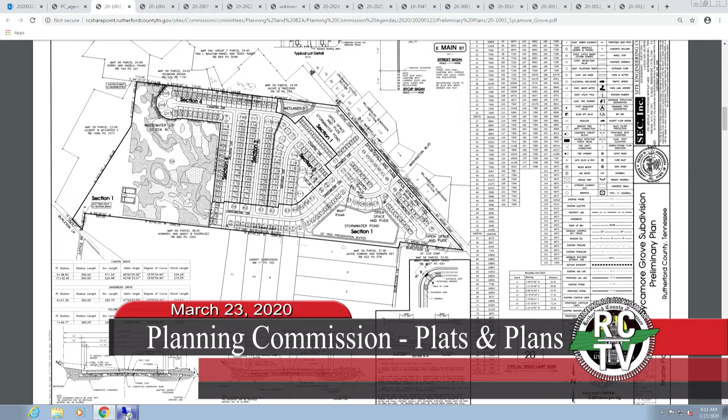Those questions will be answered at the point of construction drawings for the individual sections that will be coming in. They'll have to demonstrate to us and to Mike that the drainage in those areas will work, that this subdivision will drain properly based on our regulations.

As you recall, there was quite a bit of discussion on this regarding the drainage of the subdivision and other issues. But for the most part, our comments have been addressed as far as the preliminary plan goes. This is really just stop one on the train of approval, now that the zoning has been approved. There are several more steps left in the process. With that, I'll be happy to answer any questions, or if Mike has additional comments beyond what I've said.

Any questions or comments? Since this is a preliminary plan, are you okay with moving it forward? As far as this step goes, this will start getting them into the more detailed drainage calculations and drainage issues. To answer your question, yes, I think we're okay moving it forward, but understanding there's a lot more they'll have to demonstrate before they get any final plat approvals or permits for construction or anything like that.

I'll make a motion to approve, subject to everything satisfying Doug, regarding the drainage, just that it satisfies you and Mike. They will not start construction until we adequately review construction plans. We have yet to see any construction plans, so as far as we know they're still in the works, and we will not allow any construction to begin until they satisfy all county regulations and make sure they don't impact any of the neighbors.

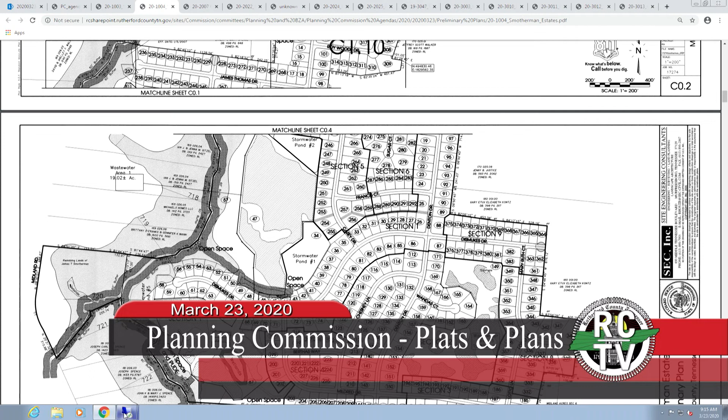Access to this property is being shown from Jones Road, with a back access point connecting to Lotto Lane, which is in the Midland Acres subdivision. The property is zoned RL, residential low density, but the zoning ordinance allows RL zoned property to apply the RM bulk requirements if it's served by a step system or sanitary sewer, which in this case is the step, and has adequate fire protection. They have provided letters to us from Consolidated saying the fire demands for the subdivision should be able to be met.

So both factors have been satisfied in the subdivision, which allows them to go to the RM bulk requirements. We do have several concerns with this plan. Most of those have been addressed.

Looking at our list of things we had left, there's still some question about showing the wetlands and everything on the sheets that were identified. That was really one of the reasons this was before the Planning Commission about a year or so ago, but it didn't proceed because we had them go back and do some wetland determinations, which they've now completed. Beyond that issue, and a couple of housekeeping issues, this is similar to the plan we just looked at, as this is just a preliminary plan. They'll have to come out with construction drawings reviewed by staff, and then final plats. This is just step one in the process.

This did not require a rezoning, if that question comes up, since this was already zoned for residential purposes. This is abiding by the regulations already in place. So with that, we'll be happy to answer any questions you may have. And again, Mike, if you've got comments, feel free to chime in.

Same situation. We have yet to see construction plans, but we won't allow construction to commence until we are satisfied that they meet all the county regulations.

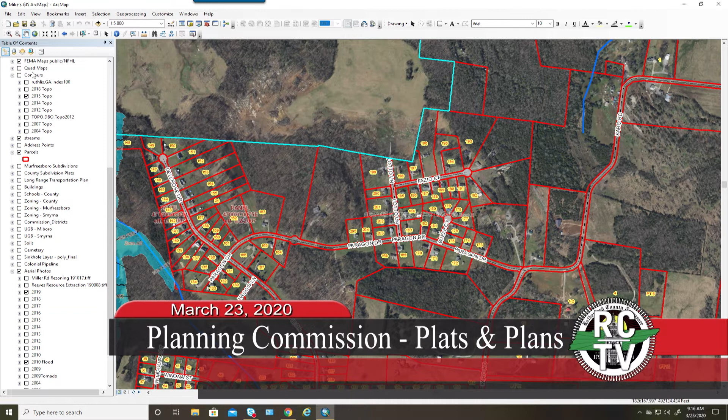Mr. Chairman, just as Commissioner Whitworth has said there, I was in that direction Saturday, and if this does come out to Midland Road, that is quite a bit of traffic on that road already. That road is already very heavy. And Jones Road only empties into Midland Road, as well as some of those back roads back there—Jones Road is not that large of a road itself. So that will have to be looked at very in detail, that traffic that will come from that subdivision. And the water that's involved in that property too. So as Mr. Demasi said there, it's got a long way to go.

Is there a motion in there? I'll make a motion to approve, subject to staff comments. We have a motion and a second to approve item number 201004 for Smotherman Estates. Other questions or comments? All those in favor of the motion to approve, please say aye. Any opposition? Motion to approve carries.

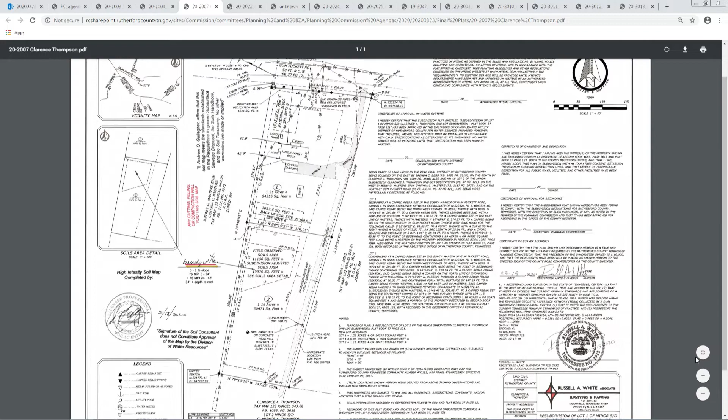I'm sorry, I'm on the wrong one here. This plat actually, the Planning Commission approved a waiver request for this property at their August 26, 2019 meeting regarding the lot being on a private easement less than 5 acres in size. So what they're proposing today is consistent with what was approved by the Planning Commission last year. However, we cannot approve any kind of plat administratively if it has a waiver, so that's why it's coming before you today. Again, the fire hydrant request has been approved, so that's a waiver they won't need. So really, the plat's in good order.

I was talking with the applicant's representative just before the meeting, and they have a couple little tweaks to make, but nothing that would hold up the plat approval. So with that, we believe it's in good order and we'd recommend approval.

Strike out the fire hydrant waiver, correct? Yes, that's correct. If I remember this correctly, this was for family. That's my understanding, yes, sir. I was looking at it with the surveyor, sorry.

We have a motion and a second to approve item 20-2007, the re-subdivision of Lot 1, Clarence A. Thompson. Any other questions or comments? All those in favor of that motion to approve, please say aye. Any opposition? Motion to approve carries. Thank you.

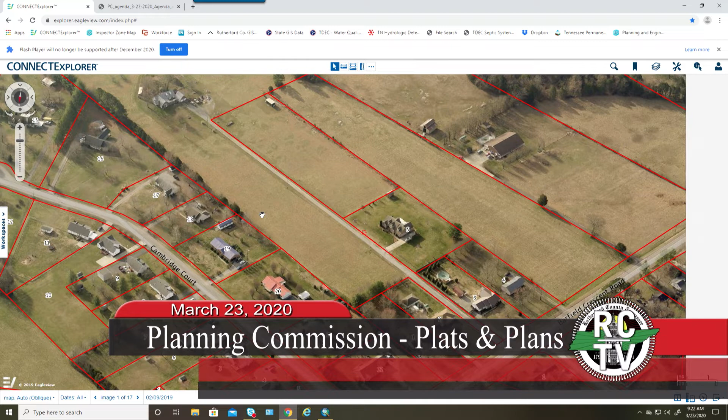I will say that the applicant's design engineer made an application to CUD for a fire hydrant determination, which did come back approved as well, so a fire hydrant waiver would not be necessary for this particular lot. With that, I'll be happy to answer any questions anyone may have.

As far as the plat's concerned, they've addressed most of the comments we have. The waivers are pretty much the main outstanding issue at this point. Our recommendation is approval—it's consistent with what was approved in the past. I'll also make that motion.

We have a motion and a second to approve item 20-2022, Mesa subdivision, section 4.

Other questions or comments? All those in favor of the motion to approve, please say aye. Is there any opposition? Motion to approve carries.

Thank you. Item 6B3, item 20-2023, Linda Harrell subdivision, 1 lot on 1.85 acres, zoned RM, located along Cranor Road.

Willie McMahon is the applicant. Waiver for the creation of an unbuildable lot. Doug explains: the applicant would like to transfer the subject property to a family member.

This proposed lot was actually created when Craner Road was extended through the property years back. It was part of a larger tract, so it's been identified as the same tax map and parcel as the parent tract, but it's just sat there. Now they want to do a transfer, and to do that it has to have its own unique ID as far as a tax map and parcel, so it has to be platted.

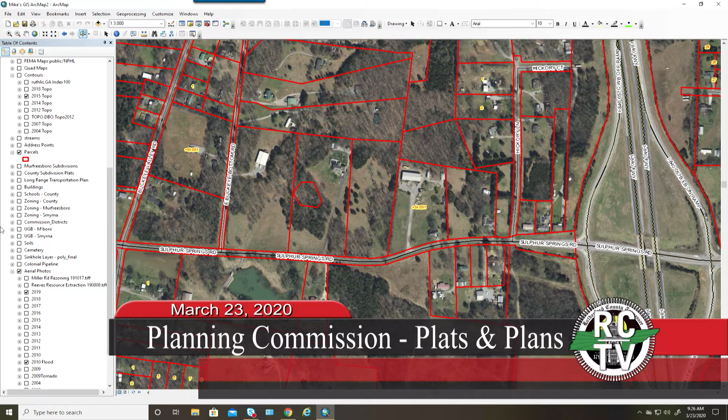Staff has also identified some other deficiencies with the plat, but for the most part those have been addressed. There may be some tweaks here and there, especially with consistency with the site plan, but other than that, unless Mike has any additional comments, we're okay with this being approved as long as they work out those other issues prior to recording. I'll be happy to answer any questions.

This will go along with the site plan. There might be some tweaking that needs to be reflected on the final plat. They have an off-site detention pond area, and they have some other issues that we need to address. But all in all, it's in good shape.

The owner owns both properties. He's going to have the septic line on somebody else's property, or is that going to be on his? Well, regardless, right now he'd own the whole property since it's still one tract of land. The reason for the plat is to subdivide into 2 tracts, less than 5 acres, but that's why all the different easements are there. So in the future, if ownership does change, there's always a record that they're relying on this. A new owner couldn't come in and say they won't let them use that, since they know there are easements there.

Now, Manley, did they have enough soil on Lot 1 for Premier Fence, or were they going to need to share some with that? They do have a small septic soil area on Lot 1, but a much larger one on Lot 2. The existing building on Lot 1 does utilize the soil there, but only a small area because it's just like a bathroom or something in there.

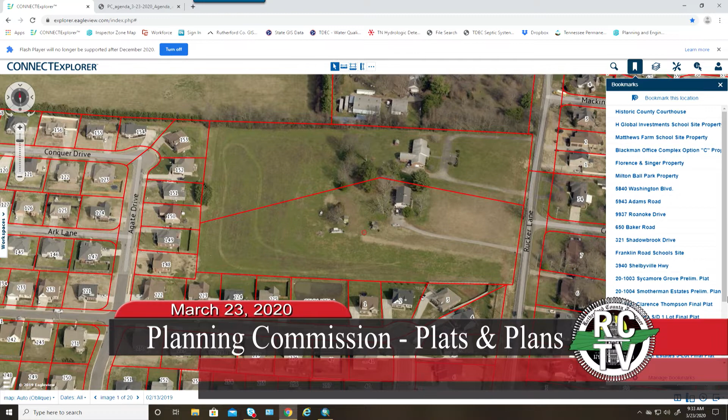I know our engineering staff has been working with the applicant on those issues. I'll let Mike address those in more detail. Most of the concerns have been addressed from a planning and buffering standpoint. There's quite a bit of existing buffer material out there that the applicant is proposing to use, which we allow for. There will need to be a little bit of area with some supplemental plantings, but that's nothing that will hold up approval.

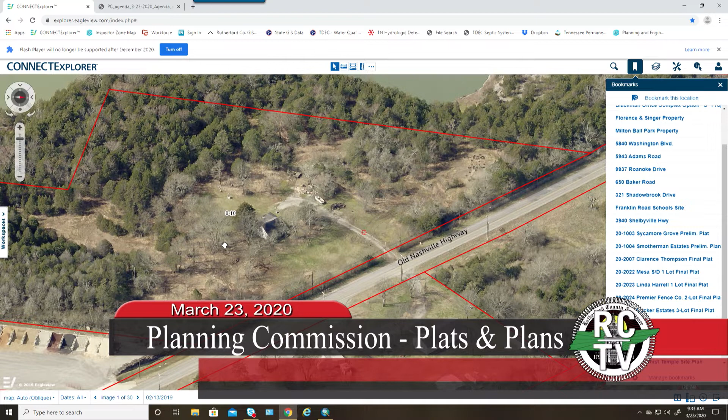That's something we can work through as we get ready for the permitting process, but again there's quite a bit of plantings out there, so the landscape plan just needs to show a little more of that. From a staff standpoint, I think we'll be in good shape. That was one of the concerns during the Planning Commission's public hearing, as I remember—that a lot of buffer area be left around the existing residences, especially to the south. So with that, I'll turn it over to Mike for any drainage concerns, but from our standpoint, most of our comments have been addressed. Thank you, Doug.

Questions or comments?

Thank you, Jim. We have a motion and a second to approve item 19-3047, Superior Property Solutions. Other questions? All those in favor, say aye. Any opposition? Motion to approve carries.

Thank you. Item 6C2 has been withdrawn. Item 6C3, 20-3010, Premier Fence Company, construction of a 3,200 square foot construction sales and service building on 2.35 acres zoned CS, located along Sulphur Springs Road. Walter and Kristen Donnell are the applicants.

Doug. Yes, sir. Thank you. This is the site plan we were referring to earlier when reviewing the plat along Sulphur Springs Road. The applicant is proposing to construct a fence business on Lot 1 of this property, which is what you have before you. As stated earlier, they will have to rely on additional septic on Lot 2, which was what showed on the approved plat.

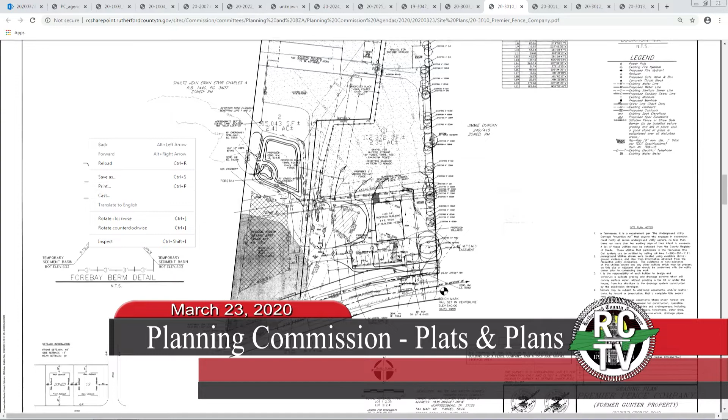Just looking at it, the shortest distance between two points is a straight line, and I think that's where the sewer service line might be. So if they're digging in this area, it might impact the sewer service line for that building. Like I said, just some minor stuff, but these are things that keep me up at night.

They are showing some cutting around the existing—the proposed—septic system here. Typically you don't want to cut anywhere around that, so we'll have to have them adjust that 540 contour. We'd like to see more of the parking area directed toward the pond, to allow it to gather. I think some minor changes there, directing the water towards this existing culvert.

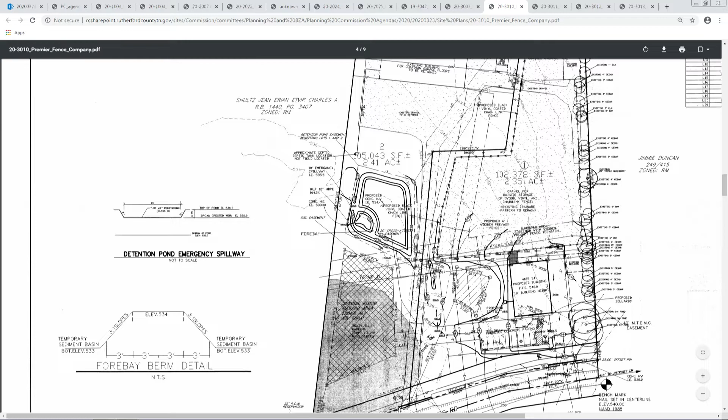There's an existing culvert underneath this driveway, and they're showing a little bit of a swale being dug here. But if we can get the water to flow in the direction of that pond and then adjust the pond, it should be in good order. So there's some minor tweaking to go, but all in all it's a pretty good plan.

When they establish where the field lines are—yes, I would have them... this is the soil area here, and I assume the existing building has a straight line to the field line here, but I don't know that for certain. It could go around underneath the driveway. We need to get them to locate that tie line to the field line and make sure they're not cutting through it when they start digging.

When they mark those, do you physically go out there and look at it? They'll probably have to go out and probe them. Yeah, yes sir, and then I'll have them reflect that on the plan.

So that's not a big deal. Looking at the topography, the pond could be adjusted without digging down so deep, and maybe relocated a little bit, but that would in turn change the recorded detention pond easement on the plat. So those are two things that kind of tie together.

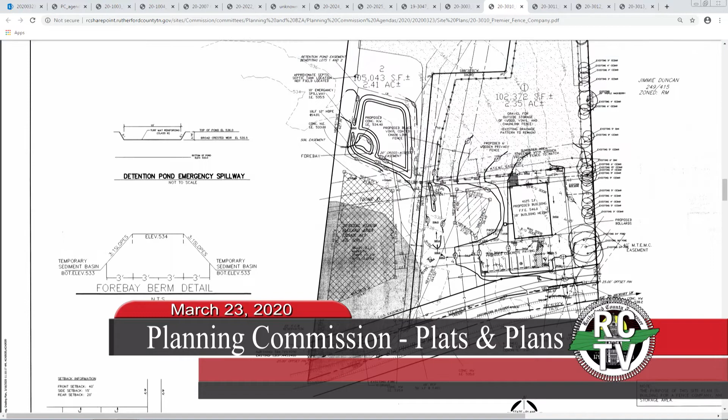But it's doable. Doug said there's some tweaking needs to be done with the landscaping plan. I'd like them to look at the solid waste enclosure, trash enclosure, which is close to an existing overhead power line. I might get them to look for a new spot, maybe in this gravel area, or another location. If you've got one of those garbage trucks, you don't want it swinging up and down underneath that power line. But all in all, it's doable.

No, sir, I think these are minor changes that we can work out before we begin construction. And I'll make a motion to accept with staff comments.

I have a motion and a second to approve item 20-3010 for Premier Fence Company. Other questions or comments? All those in favor of that motion to approve, please say aye. Aye. Opposition? Motion to approve carries.

Thank you. One observation, Doug and Mike: what you said was minor, but there was a lot of it. And it kind of bothers me as a planning commissioner that we're seeing stuff for a final plat approval that has a lot of stuff, even though it might be minor. Is that something that makes me, and I see a couple of other folks, a little uncomfortable that a final plat is coming to us with still a lot of stuff to be done?

Well, that one was associated with the site plan. So we've got to get the site plan situated, and then the final plat has to reflect that, especially with that offsite easement. If there wasn't an offsite easement, the final plat would have sailed on through without it. It's the site plan that needs some more work than the final.

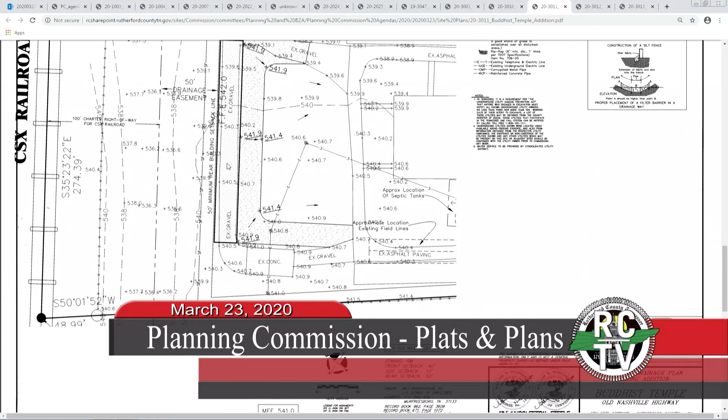It's a lot of it. This area in the back is in a FEMA flood zone, and non-livable space. The finished floor is 1 foot above, but they do have a little box down at the bottom with a minimum pad, minimum floor is the same, but it doesn't reflect what's shown on the proposed building site.

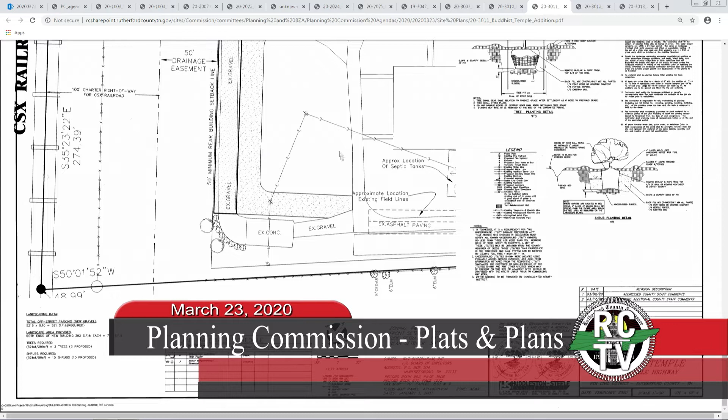Let's see what else — I think that was the main thing. Let's just coordinate that. Oh, and the field lines, some of them might have been impacted by prior construction. We'll need to get them coordinated with the septic system, TDEC, groundwater protection, septic permit office, and then also building codes wanted to research some of the buildings that in the past were constructed on this property.

And one of my pictometry maps is kind of acting peculiar. Let's see if it'll work. Okay, so where they're proposing to build is in this area here. It is in a FEMA flood zone a little bit, but it's going to be open on all sides. I think it's more like these other structures where they're open on the sides.

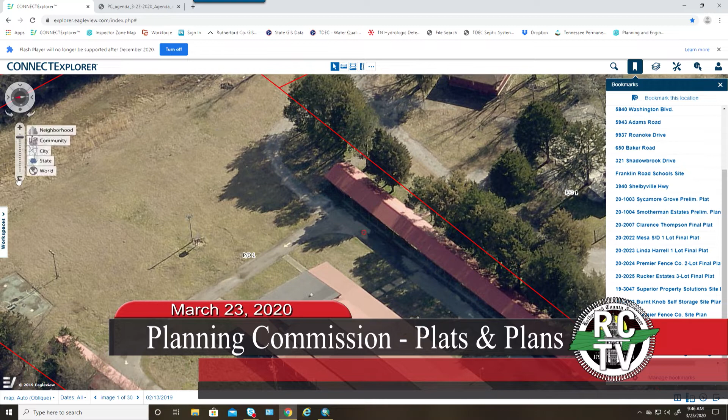So it's not going to be as big of an impact if the water's allowed to flow through freely. These are like open pavilions here, and they're proposing to build right back in this area. So we just need them to coordinate with the previous construction on site and make sure the septic systems aren't impacted by that construction.

It's just because non-livable space has a lower standard, just 1 foot above the base flood elevation for FEMA. Livable space is 3 feet above, so it's a little stricter if someone were to live here, but since it's not a living surface, they can build to the lower standard.

So if they build it up, Mike, and build a pavilion type of building, open space, and at some point in time they want to enclose that, they would not be allowed to do that. No, if it's going to be used for living space. If it's just for storage or non-living religious function, they could still do that, but only if it's built up to the standard we require.

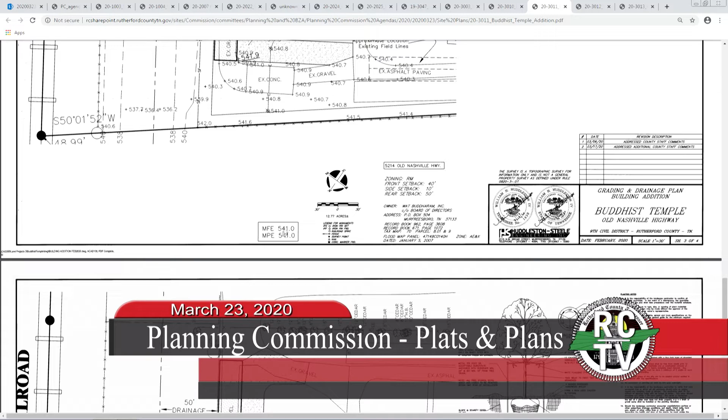So they're building it up. We are requiring that they build up, and just want their plans to reflect that. See, the floor is at 542, but they have a little box down here showing minimum finished floor 541, and the pad at 541. That should be adjusted to reflect what's up here—so there's a little inconsistency.

Let me make sure I'm clear—what if they prefer to have the pad at ground level so they don't have to add steps and handicap ramps? They would just have to adjust the site for that. We can't wave our magic wand and say you don't have to do the FEMA requirement.

But if it's not a livable space and it's just a meeting space, why do we care if it floods? Well, we still want the building protected, and we don't want the building impacted by the base flood elevation for what they used to call the 100-year storm event—it's now a 1% chance. So there's still a statistical chance. Floodwaters have hydrostatic pressure that pushes on the building. We don't want the building...

Mike, I get that, I get that. But there's no hydrostatic pressure to push against because there's no walls. Right, but—and this is not a livable space. So why do we care? I mean, we could have them lower it down, but still—do you see what I'm saying? If it's not a livable space, if it's just a meeting area, it's nothing.

This is no different than the pavilion at Barfield Park. Right? Why do we care? Why would we want to make them put in a handicap ramp and stairs for these people to climb, just to get it to an elevation for a flood level that we don't even care if it floods?

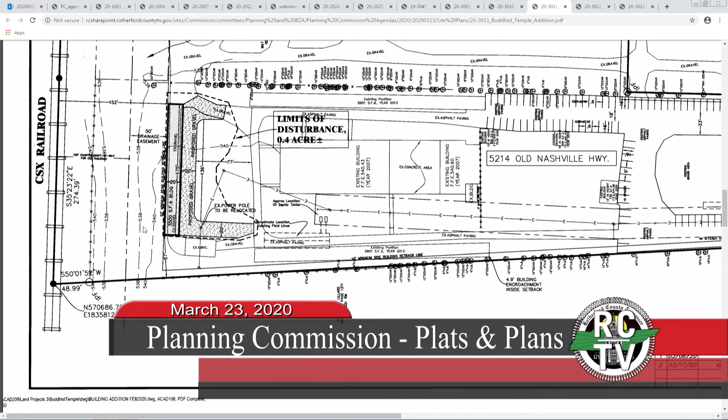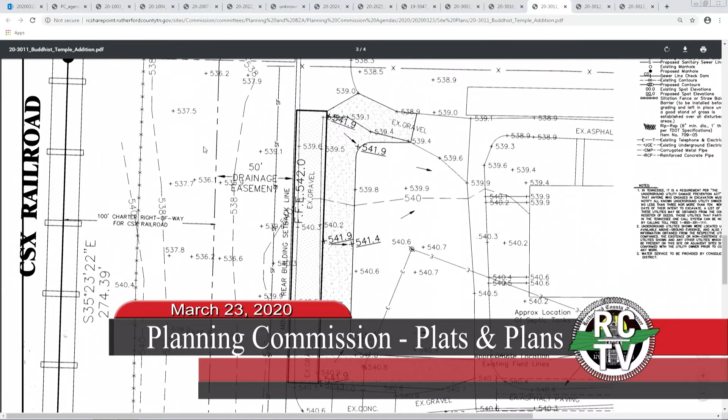Let me see if I can get that right. Okay, from, I guess, from the southeast flowing through here. But no, just to answer your question, Mr. Whitworth, no, we didn't see that necessary for that little of an area.

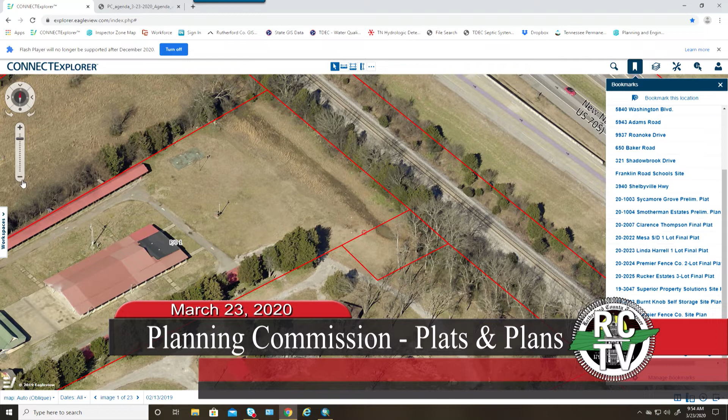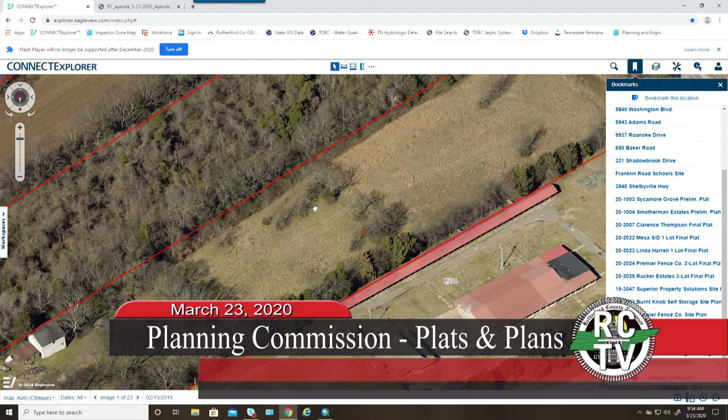Staff recommends approval. To approve with all of staff comments. We have a motion and a second to approve item 20-3011 for the Buddhist temple. Other questions or comments? All those in favor of the motion to approve, please say aye. Is there any opposition? Motion to approve carries. Thank you.

Item 6C5, 20-3012, Tennessee Bounce Parties, construction of 12,000 square feet commercial building, party rental equipment with related parking on 5+ acres, zoned CG, located along Old Nashville Highway. Active Investments is the applicant. Doug? Yes, sir. Thank you.

The applicant is proposing to construct a facility that rents party equipment, such as inflatables, tables, chairs, etc. The property was actually rezoned last year, and this is in the same general area as a couple of the other site plans we've already considered today. There were several comments identified after our initial review. Most of those have been addressed. I did have some concerns with some of the buffering being shown on the landscape plan.

There still needs to be a little work done on that. But again, those are things that shouldn't hold up any kind of approval, but we'll continue to work through them. They do need to identify a type 2 buffer between residentially zoned property and properties zoned commercial. Further back on the property, it's actually adjacent to land that's heavy industrially zoned, so the buffer doesn't have to go that far back.

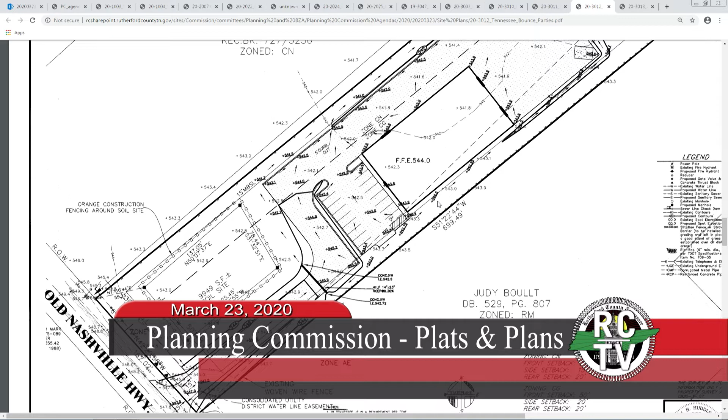So they're proposing, I think, a 12,000 square foot building here. They're elevating it and adding parking and drive aisles and storage area in the back. What I'm kind of concerned with, the building, they're raising it up, but water kind of flows from the southeast to the northwest through here. So I'm worried about water getting trapped here. They are showing a little bit of improvements, but I don't know if it's enough to get the water out of there. Might have to extend the ditch back a little bit here.

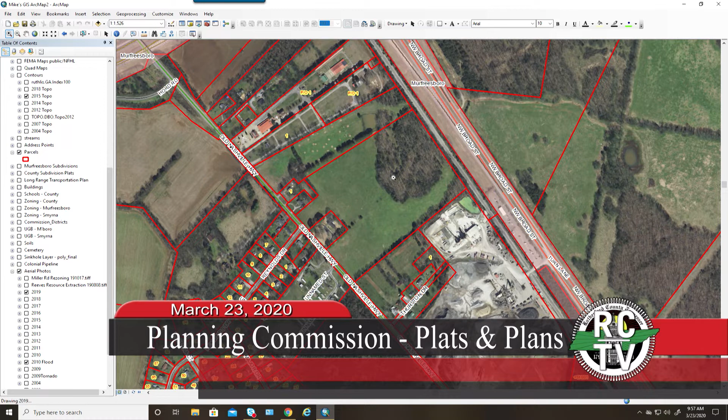And then it drains, let me get to my maps. It drains to an on-site area that we were hoping was going to be used for a regional detention area, but we're not seeing any improvements on that proposed location. They're going to utilize an existing sinkhole and modify it, but let's see if I can get my contours to turn on.

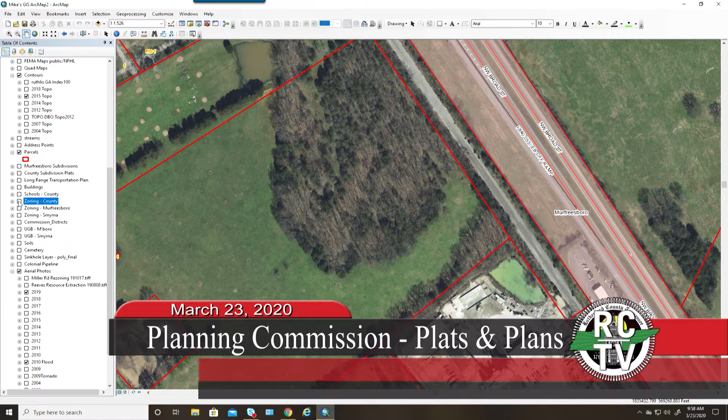In this area, the proposed site is here, and like Douglas said, there are other tracts that will be developed in this area, and we thought that'd be a good idea to have a regional detention instead of each separate lot having their own detention.

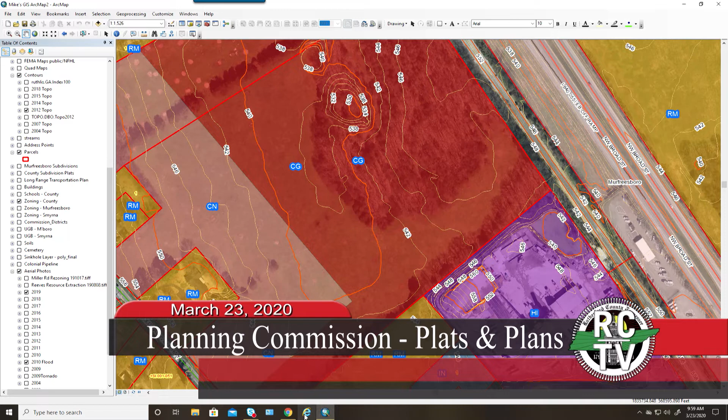We were wanting them to maybe have a regional pond here, but for some reason my contours are not coming up. Let me try a different one. There we go. Here's the sinkhole location. We were assuming that they were going to modify that, but we have, they're not showing any improvements to that area. So I don't know if we've addressed everything on that. So if we're adding additional parking, roof, all that substantial area, we're going to need to see some improvements.

This pond takes water, sinkhole takes water right now. We're adding all this additional impervious area. How is that going to impact the surrounding property, downstream people, if it builds up and spills over? So this one, I think, still needs a little more cooking because I haven't seen improvements to that pond. Maybe Manley can help me and tell me what's going on with that.

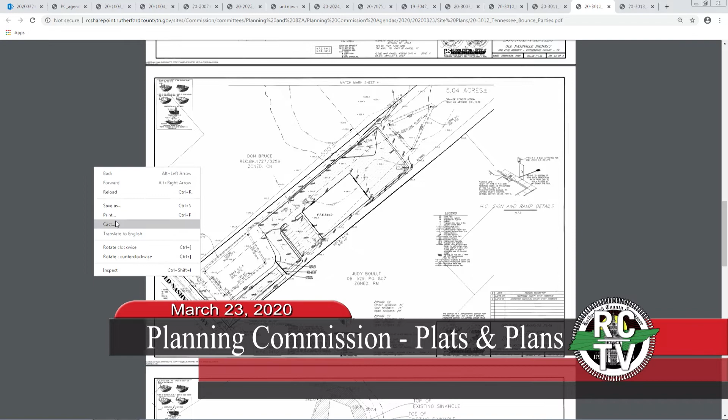Morning, Commission members. Manley Thweet with Huddleston-Steed Engineering.

The sinkhole he's referring to, we're not going to modify it. We've done drainage calculations for that sinkhole, and based on its present condition, it is able to treat the water, really not only from this tract, but also there's plans to have this property in I think 5 separate tracts. Our drainage calculations show that this sinkhole in its present condition would be able to treat 3 of those tracts, and then the other 2 would not be able to go to that present sinkhole.

We have already begun the paperwork process for TDEC to get an underground injection control permit, basically to allow us to be able to drain to that sinkhole. So the plans right now are not to improve the sinkhole at all, but just to have the stormwater go to it as it is, as well as have the next 2 tracts to the northwest be able to drain to it. If the Commission requires some modifications to it, that's something we'll have to take into consideration, I guess. But under its present conditions, our calculations do show it's okay.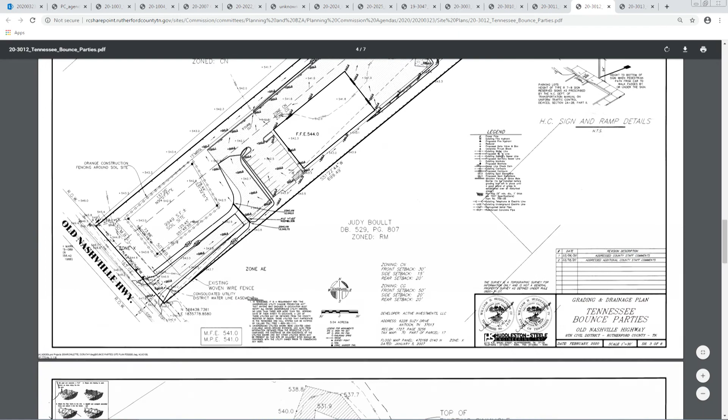Well, if I can go back to the plans, this relies on conventional septic system soil. So he is developing in between his two soil sites. There's one large one in the front and a smaller one in the back. And the way it is draining now, he could essentially lose one of his septic system soil sites to obtain a pond in this area, but it limits what he can do with the rest of the property. So we saw this site and the other sites as an opportunity to pay a maintenance agreement to have this pond maintained and investigated.

But I guess maybe it's because I've been cooped up for a while and I'm getting cabin fever. But Jim has talked about, Rhonda has talked about, we all understand that sinkholes are unpredictable. Yes. Water can go in, water can come out. Yes, so it's a scary thing. As an engineer, you don't know how much water you can let drain in there. And if I had a house next to one, I'd be a little leery about how much would pump out.

Right, so you're talking about a regional system. You're talking about this tract and 4 others maybe dumping into there. And I'm thinking here, okay, we don't know.

5 times we don't know on 5 lots. So I'm thinking, okay, the state says you got to hold 1 inch, period, before you let it leave your property. So I'm saying, why don't we just make them hold the 1 inch? And you're saying, well, there's some soil issues, and I'm saying, well, if you can't build, you can't build. Well, you hold the 1 inch, or you do the 80% TSS removal, total suspended solids. So either option.

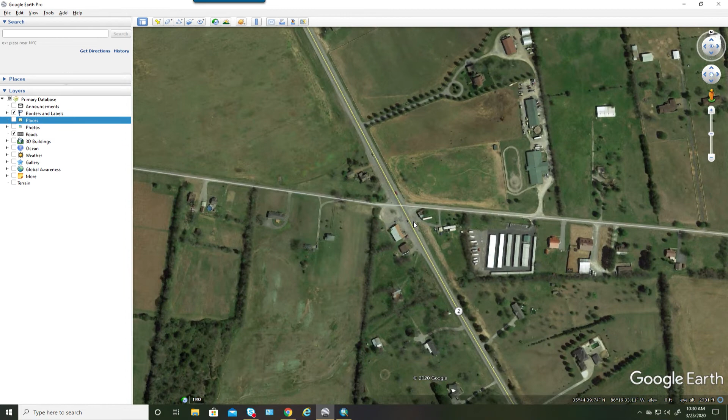One of the things we've been working with Manly on, no fault of his own, is an existing structure—I'll show you at the corner of Manchester Pike and Gum Road. The property is proposed in this area, but this structure is part of our heartburn; it's grandfathered in, been there probably since the Civil War, maybe not that long, but we were working with Manly to relocate the driveway farther to the east, and he has done that.

What we're concerned about is you've got RV, boat, and trailer parking coming in and out. The existing site is here, and they're proposing the mini storage places with buildings. You can see they have some RV parking here, and they're wanting to add covered parking in this area and more parking spots around here.

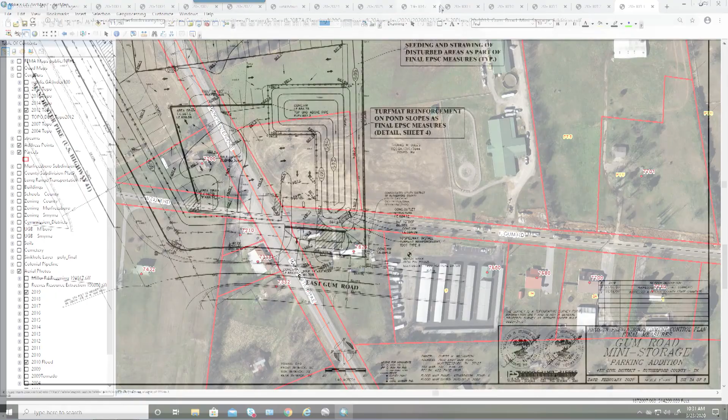So our thought is to get the driveway as far to the east as possible. Somebody coming around this corner with a large vehicle, an RV pulling out, might have some conflict. So they've moved it as far east as they feel they can, and what we've had them do is address the wide turning radii on this driveway to allow a larger vehicle a smoother transition out into Gum Road.

But in working with the additional runoff and imperviousness of the area and creating a pond here, it has generated some unusual turning movements for large recreational vehicles. Earlier, we did have the ability to run straight through here, but the pond has grown through our comment and review cycle.

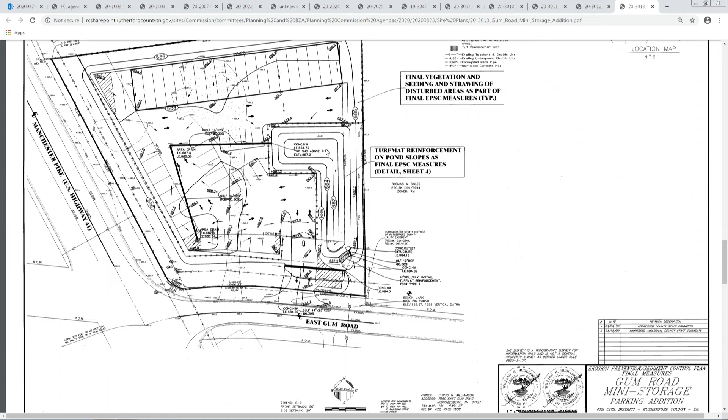So we're wanting them to add a large truck turning template to show an RV being able to maneuver through here and get into this covered parking area. They do have a wide area—30 feet in places, 33 in others. And I don't drive an RV, but even somebody with years of experience, I think that would be a hard maneuver.

So what I'm getting at is I think they need to look at this a little bit more. I don't feel comfortable with an RV swinging around. I'd hate to rent this last spot and have a hard time getting in and out. So I apologize, I think this one needs to cook a little bit more too.

Mike, I have two questions. With Manchester being a state road, would they need to get permission to come in off of that, right? No, their driveway's on Gum. But I'm saying, could they, if they wanted to have that access off of Manchester, is that a possibility? Yes, that's a possibility. They could get a driveway over here, and a good spot would be way down here, might be a better location, but they'd have to go through the state for that one.

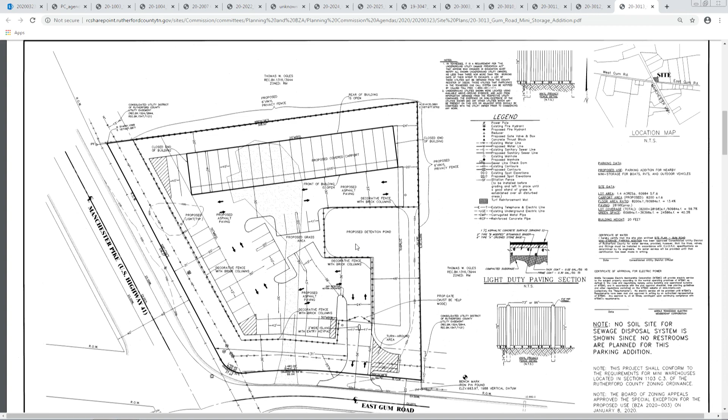I think this still needs to cook some more. I've got a little trailer driving experience, and you're not going to take a truck and trailer and back it in that first hole up there. Right. I was born without the trailer backing gene, so it's difficult for me, even with a small garden trailer. That's what I'm saying, this needs some more review and processing.

Mr. Chairman, I've heard about enough. I move we defer. Hold on, Mr. Chairman, we've got a motion. I raised my hand before. I raised my hand, he didn't.

Why don't, instead of an open pond, we just put the storage underground in pipe chambers? You could do that, and pave the whole thing over the top of it. Problem is solved. Yes, sir. And it's about $10 a cubic foot of storage volume he's got to budget. Problem solved. And then you could still use that area. Yes, drive over it, park on top of it. Yes.